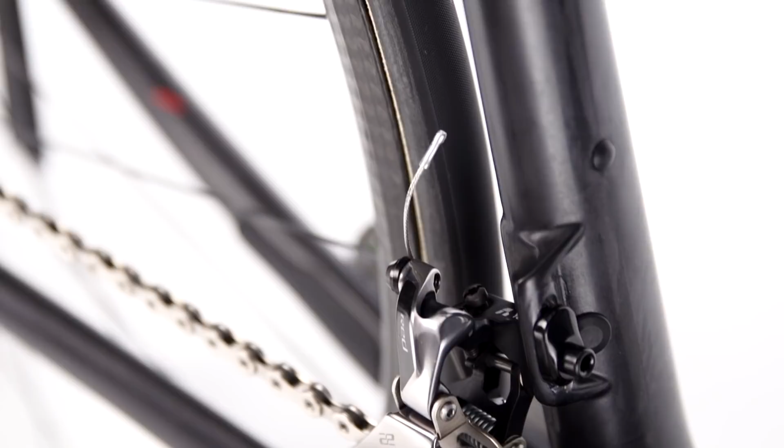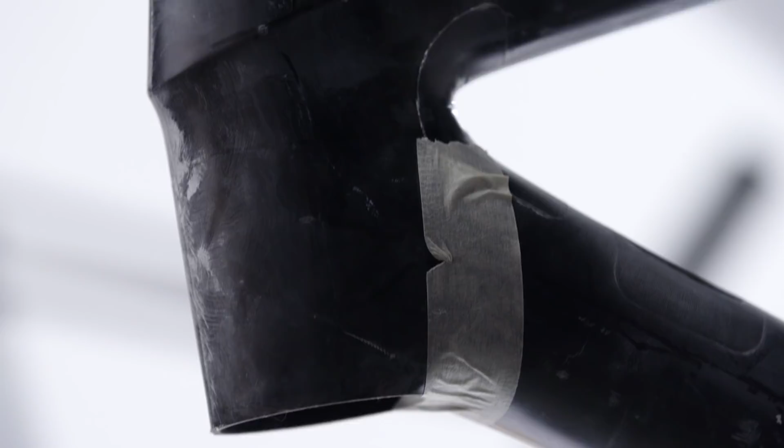You mentioned ride quality with vertical compliance, but also in terms of ride testing, I know we did a lot of work on this bike to make it actually ride the way we wanted it to. Can you talk about that? Yeah, so ride quality is one of those levers that we played with. Every tube shape has a testing number that's associated with it. So as we are twisting this frame in the computer, we're able to predict how it's going to ride. Yeah, I was one of the ride testers on this project, and we had been riding these over a year out from launch to really fine-tune that stuff.

Were you involved with any of the discussions with the team on having them test this and prove out that this was a great bike? Having our own team is a huge benefit. We like to use them in a couple different places in our process right away when we're thinking about a project. We interview them, we talk to them about what they hate about the current project or what they want to improve.

So obviously, huge success. We had a 10.25 pound complete bike, really well regarded frame in terms of ride quality, handling. How did we start focusing on the development of the second generation bike? That's a cool question that people like my mom would ask. You just made the best bike ever. How are you going to make it better?

So that's something that we ask ourselves: what's next? I think a lot of it comes down to dissatisfaction. There's always something that we wished we could have done. We didn't have the materials available yet, or we didn't have the technology to analyze it the way we wanted to analyze it. It's hard to leave your baby behind, but if you know that you can do better, we just keep doing that.

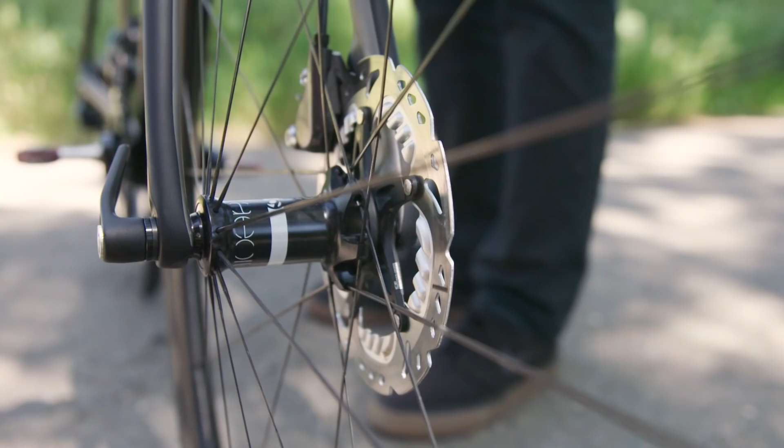So we're always trying to up ourselves, and that's where the next generation came to be. So what specifically were we looking at when we were making that leap from first generation to second generation? What were those dissatisfactions? We had to make it light, make it work with disc brakes. We had to employ some new tools. We have software that can allow us to input all those variables, and it'll calculate hundreds of different options and find the right combination of stiffness, less material, comfort, whatever the attribute that we're after.

So you're saying you didn't do anything on the new bike, it was all computers? Typed in a couple numbers and then science.

Nope, still a full team. We just had another tool to help us out. So we still have to make decisions about which one of those iterations is important. What specifically were some of the features on this bike that came out of that research and development?

If you look at the head tube on that bike compared to this one, this area has actually gotten wider on this version. This bike here. You wouldn't expect making something bigger is going to make it lighter, but it does make it stiffer. And the way we were applying the materials, we're actually able to make the whole bike stiffer. Subtle changes like that made big differences.

You also see the top and bottom of the top tube in this model are concave. That helps with the structure of the seat mast and to be able to carry the stiffness all the way through the top tube into the seat stays and keep that part of the bike anchored. Pretty subtle stuff, but when you're talking about the amount of optimization that went into this bike, it takes 90% of the time to do the last 5% or 2%, and that's kind of where we were in this bike.

Right. And so obviously, going to a disc frame and being at 665 grams versus a 690 gram rim brake frame, that was a lot of weight that we had managed to pull out of that. Yeah, pretty incredible. So in your time researching and talking to those riders, what are people dissatisfied about?

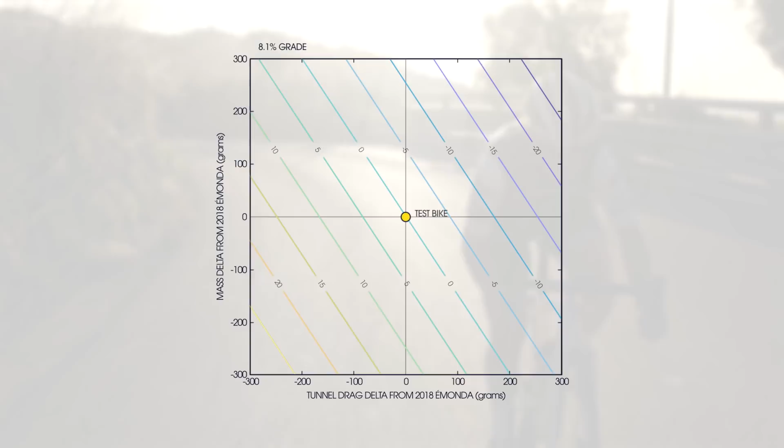Right. We know if we reduce the weight and if we get faster, we'll be faster up Alpe d'Huez, but that's not necessarily the most efficient way to get there. So before we did any engineering at all on the bike, we decided to create a roadmap about what's the most efficient way to be faster up Alpe d'Huez. And the way to do that was to get our current bike, calculate the time up Alpe d'Huez. And then what happens if we add 500 grams of weight to the bike in order to reduce the drag by 100 grams? And we did that trade-off for every single point on this roadmap, plus or minus 1 kilogram of weight and plus or minus 30% in aero.

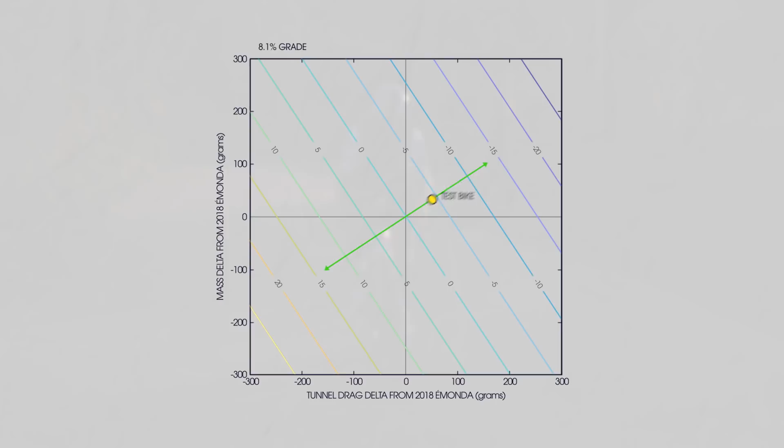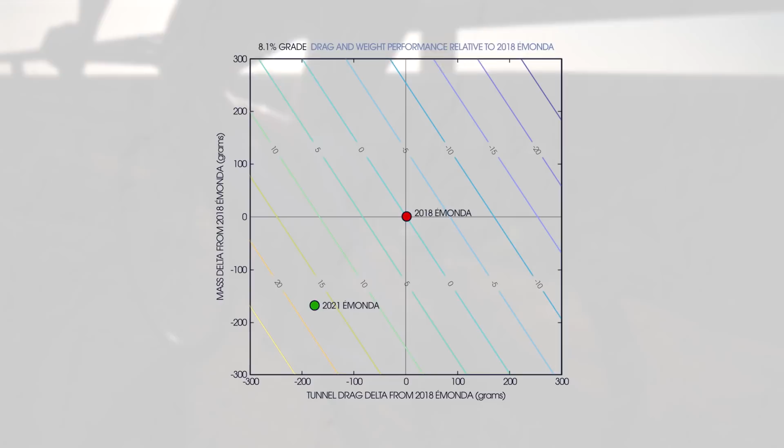And so what you get on that map is a set of contours that's really similar to the elevation contours on a map. You want to see the fastest way to climb up a mountain, you go in the direction that the contours are closest together. And so you do the same thing on our roadmap, where the contours are the time up Alpe d'Huez. So we see where we are currently, and then we see if we reduce about 3 times the drag for every unit of weight, that's the fastest way to get faster up Alpe d'Huez. Every time we create a new prototype or have a new wind tunnel test or run any CFD at all, we can track our progress on that map to be faster.

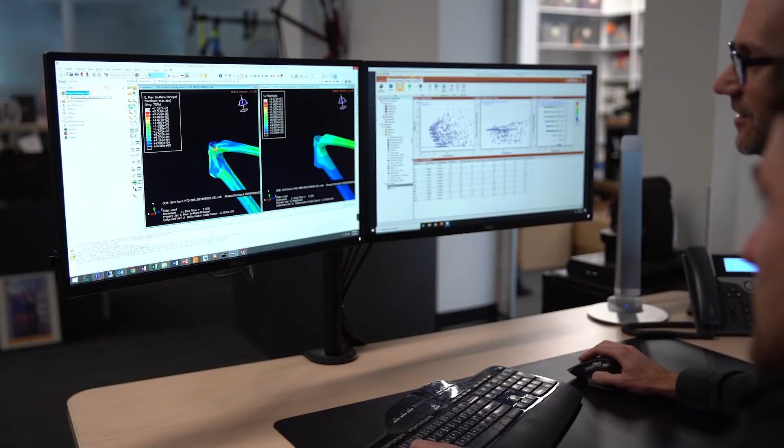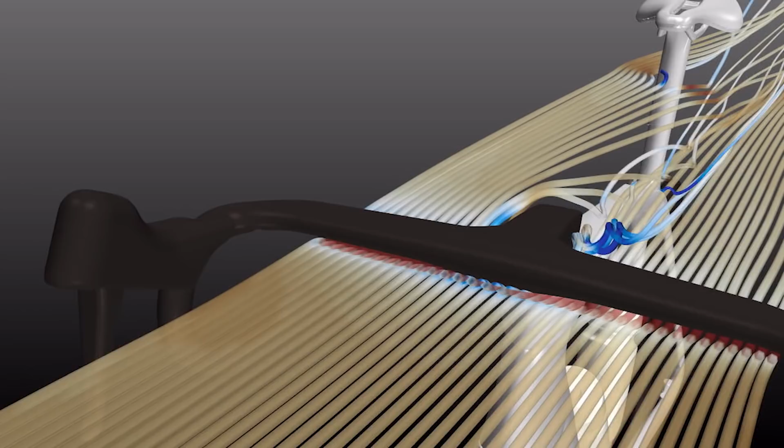So we've identified that balance. We know how much faster and how much lighter we want to make the bike. How do you then start designing that? We didn't want to just make a small change from the old Émonda. So we had a clean sheet design. We tried everything that we thought might work. Lots of different concepts that we narrowed down looking at aerodynamics and structures. Once we narrowed that down a little bit, we got our initial concept and entered the detailed design phase of the project, which was where I did a lot of detailed CFD, computational fluid dynamics, on that initial design, and kind of ran through the flow visualization with a comb to see where the areas of opportunity are.

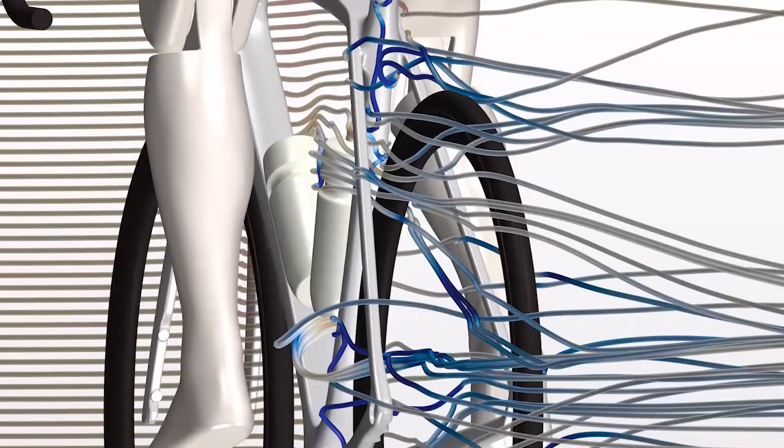Where do we put the highlight lines? How deep do we have the tubes? Things like that. So after that detailed design phase, we've kind of locked down where we are in the geometry, where we have features like highlight lines and how deep tubes are, but the tube shaping themselves, that's really where HEEDS shines, and so that's the final phase of our design process. And then what is HEEDS?

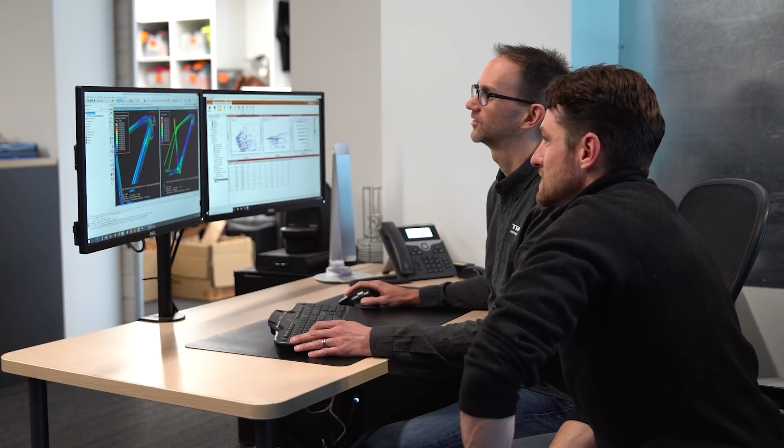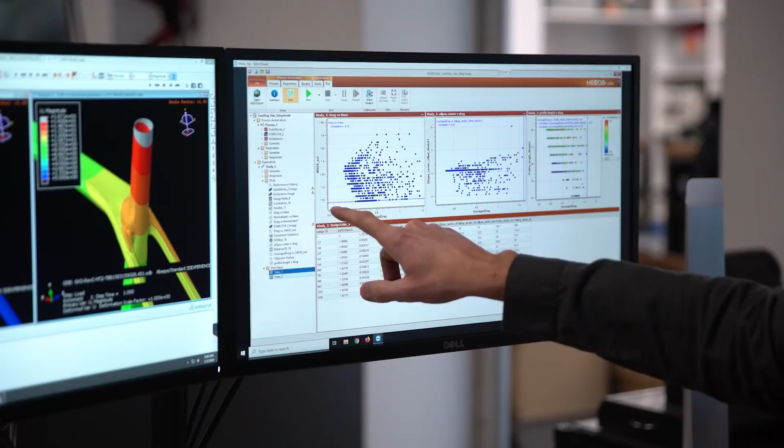It's a software that connects all of our different engineering software, so it connects my CFD, it combines that with our structures, it has an optimization algorithm that connects these different analyses and tracks them onto that ideal blend of weight and aero. Instead of me trying to do this manually with our structures team where I say, okay, this design is 10% faster, but the structures team then says it's 100 grams heavier. Well, then they have some recommendations which screw up my aero, and we kind of go back and forth. The optimization software helps track directly onto that most efficient path that we calculated in the roadmap.

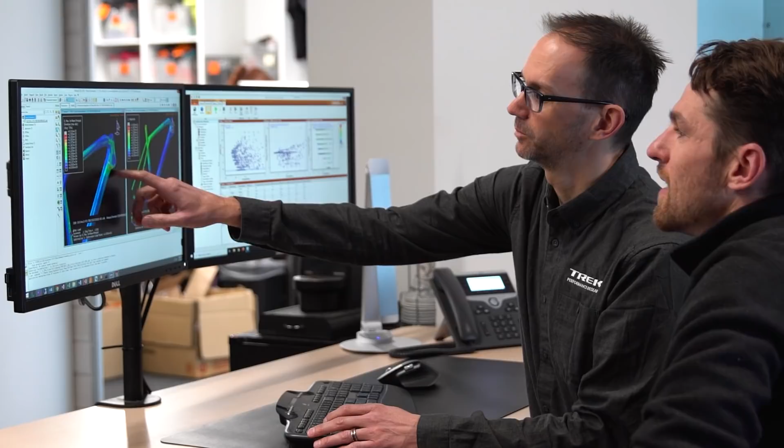Okay, cool. And so is this something that can just run on your laptop at work, or is there a lot more computing power behind this? So yeah, we have, I guess you could say, a supercomputer. We also, for really high computationally intensive cases, will burst to the cloud. So that's what we'll use for things like unsteady aerodynamics.

Unsteady aerodynamics is particularly important for a bike like Émonda because you're riding slower. Your riding speed is almost as fast as the gust that's coming in, which creates a limited time disturbance that propagates down. So you have to look at that unsteady aerodynamics, which is kind of an order of magnitude harder to solve computationally. So are you saying the Émonda is more optimized for climbing aerodynamics? Would you say that? Right, that's why we focused on unsteady aerodynamics.

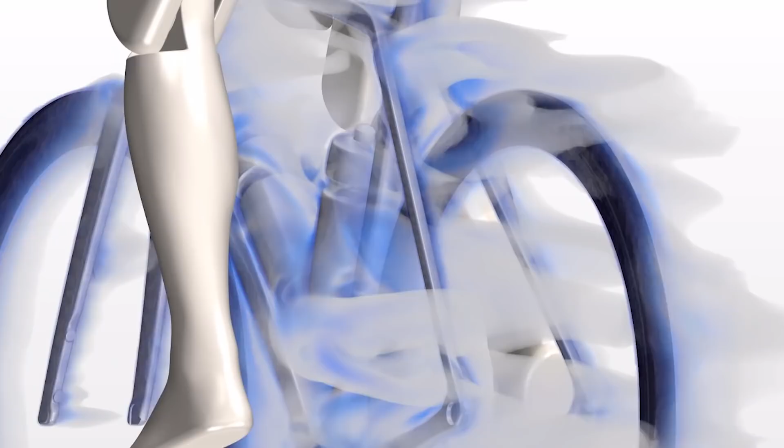For something like Speed Concept, unsteady aerodynamics will be important if you're riding in very heavily gusty conditions, but not as important as if you are on a bike with much shallower tube shapes and when you're going slower with more wind coming at you. All those three things create the recipe for unsteady aerodynamics, and you see all those three things in a climbing scenario. So that's why we really focused on it for Émonda.

Okay, awesome. And can you point out some specific examples of how we actually tweak these tube shapes, both through CFD and HEEDS? Yeah, so we kind of started from front to back because there's the most area of opportunity in the front before the airflow gets churned up by the legs and all the different turbulence from the tube shapes. We spent a lot of time on the highlight lines and the head tube, making sure those straighten the flow out and were aerodynamic. In particular, the down tube, we spent a lot of time in HEEDS on. It's a really good candidate for optimization.

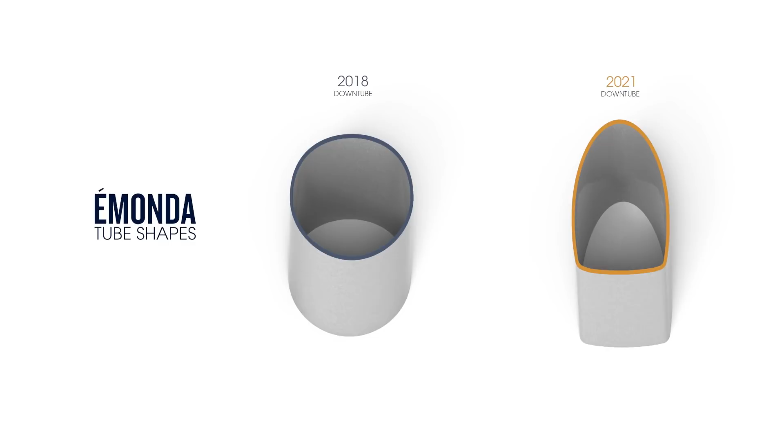So at the top of the down tube, you've got the rim and tire that are influencing the aerodynamics on the down tube. So that's a different scenario than right here, where you've still got a wheel in front of you, but the rim and the tire, they're further away. So you've got more time for the flow to straighten out at the nose. And then often you'll have a bottle, so we ran with and without a bottle, and that created a slightly different shape in this section of the down tube than this section. And so you see that in a lot of areas on the bike.

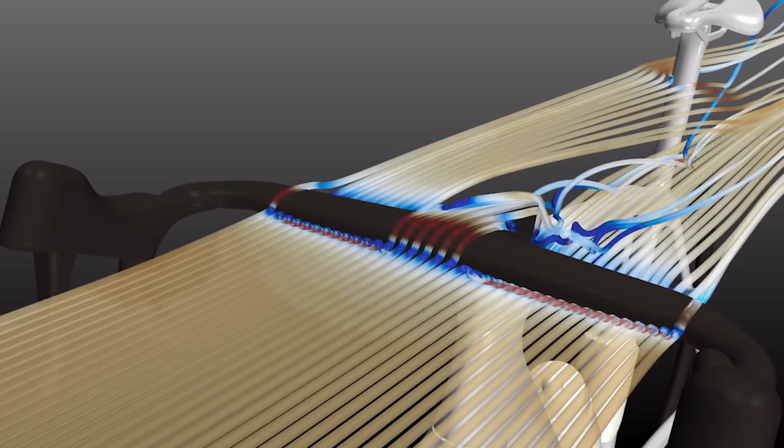The other part of the bike that we spent a lot of time on for aerodynamics is the bar stem. And the bar stem has a lot of aerodynamics baked in, but also trying to balance out the ergonomics and the structures, obviously. So we had started with our Kammtail shape on the tops of the bar, but the Kammtail shape isn't really that comfortable to grab because you've got kind of a hard edge in the back. So we increased the radius there, but ended up with, I think, a really good shape that blends all three of those. And so it's a really fast bar stem. Cool. Yeah, I can say, having ridden it, that I find it to be pretty comfortable, and it feels like it struck that balance really well.

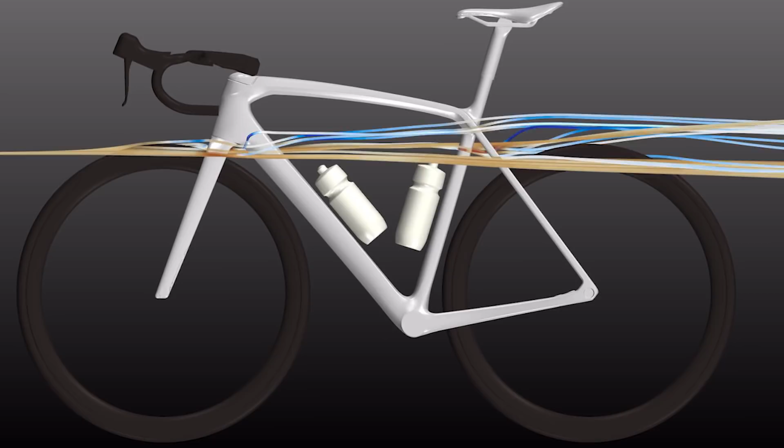Awesome. So we have this great testing tool of CFD with actual wind tunnel, real world experimentation. How do you balance those two things? Really the meat of our design process happens in the CFD, partly because you can do rapid designs in there. You can also, though, do whatever you want. We can take our findings from on-road experiments and say, okay, there's this amount of turbulence. We can plug that into the CFD and try things like, okay, this is a slower climb up in the Alps where there's a lot of gusts. You can't necessarily do that in the wind tunnel. We do use the wind tunnel, of course, though, for validation. It's the ultimate authority on, is your bike faster in a steady environment?

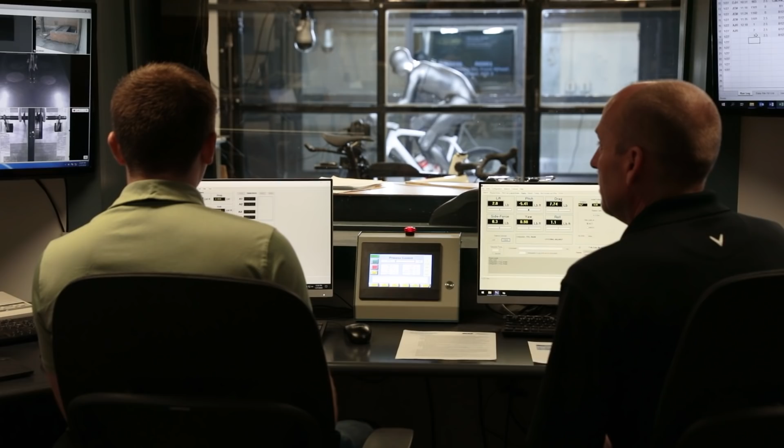For the Émonda, we had, I think, 3 wind tunnel tests. So the first one was our first prototype, and then the second one was what we thought would be our final prototype, which ended up being great. And then the third one was our total validation of our production mold and how is the final bike, checking to make sure it's as good as our second wind tunnel test, which it was. Awesome. That must feel good when you get that agreement. Yeah, it's always a little bit nervous before the test happens, and then the test itself is a whirlwind of activity. But then, yeah, to see the numbers line up is really great. Awesome. It means you did your homework right.

Yeah. And for our friends who don't live in places where it's super hilly and still care about fast aerodynamics, will the Émonda be really good at a high speed as well, aerodynamically? Yeah, so when you're going fast on the flat, the aerodynamics are almost the entire part of the picture. And so 180 grams is a huge impact there. That is about 18 watts of power and would end up being about 60 seconds per hour faster on the flat.

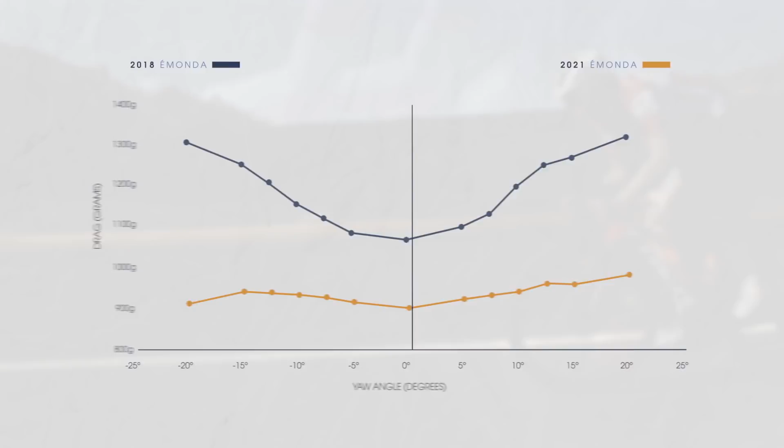So we've talked about how we got there, what the changes to this frame are, what's the science and the math we can put behind what we've delivered here. The new Émonda was about 180 grams faster in the wind tunnel at pretty high speeds. That's going to be about 18 watts.

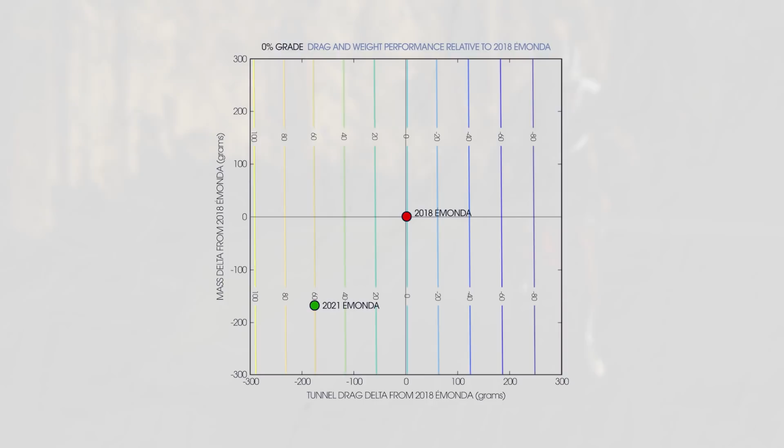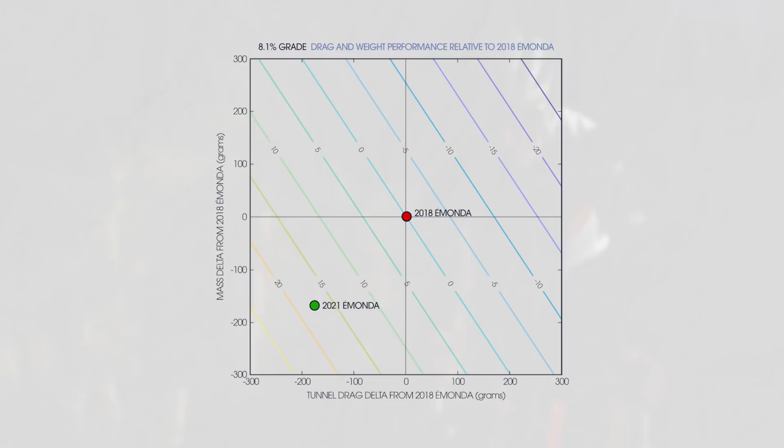And then in terms of time savings on a flat surface, that's about 60 seconds per hour faster. And then with our Alpe d'Huez target, that was about 18 seconds per hour faster up Alpe d'Huez. So that's a huge margin, especially when you consider a racer on Alpe d'Huez finishing 6 seconds behind the leader or 12 seconds in front is huge. Yeah, seconds definitely matter in that scenario.

So awesome. And so for someone who's not a professional, who's not going to win the Tour stage up the Alp, how much aerodynamic savings and impact will they see on this new bike? Right. So if you think about it, the slower you ride, the more opportunity you have for aerodynamic improvements. The other thing that helps with this bike in particular is that it is a climbing bike. It is optimized for speeds that aren't necessarily that 45K. And so a climbing bike is nice for that regime of aerodynamics.

Awesome. So you're saying this is faster for pros, but maybe fastest for the average person? Right. I mean, I ride an Émonda, so this will be fastest for someone like me.

Okay. Yeah. Awesome. Are you getting a new bike? Yeah. Can you hook me up? See what we can do.

Okay. Thanks for that awesome overview of the development, and congratulations on some huge success here. I mean, 180 grams of aerodynamic benefit saved is massive, and putting that in perspective of a minute per hour on the flats is really remarkable. So nice job there. Thank you.

Next, we're going to turn to Jordan Roessingh. He's our product manager for Road, and he's going to be telling us all about OCLV 800, the new miracle carbon fiber from Trek. It's really a huge leap forward for us. And that's really important because we made all these aerodynamic improvements, but we needed to keep the weight down, as John mentioned. And so OCLV 800 is our key to doing that. And Jordan's going to tell us all about that.

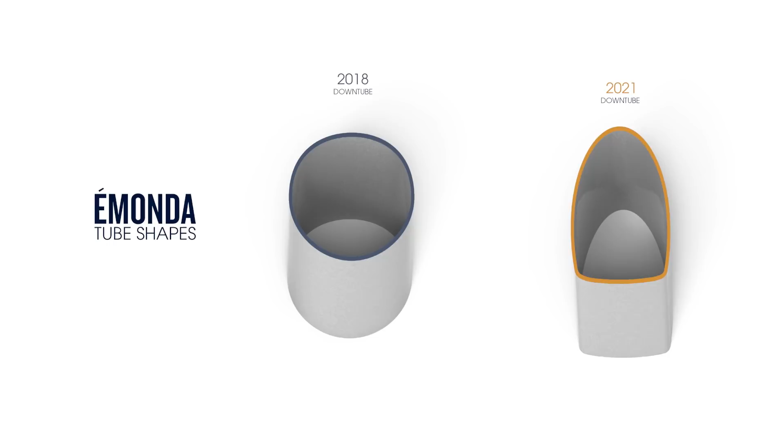And so when we went through that aerodynamic investigation, we discovered that as you add aerodynamics into the mix, the frame shapes become structurally somewhat less efficient. And so that means that the bike, in order to maintain the same strength and stiffness, would have to add weight. And so we set a rallying cry of 700 grams for the frame that we wanted to stay under in this development process.

We really needed a new material in order to hit that target; OCLV 700 wasn't going to be able to hit our frame weight targets. And so we had to go out and try to understand if there were new materials, new processes available to us that we could leverage to hit our goal.

Obviously, we're not using one material through the whole bike. We use different carbon fibers in different applications. Can you tell me a little bit about some of the properties of different carbon fibers and why we would choose them?

Yeah, so within a carbon frame, there are a bunch of different fiber types as well as a bunch of different pieces of laminate that we use throughout the entire frame. And so what we're really looking at doing is understanding what the behavior of the frame needs to be in specific areas. So in order for a bike to be really responsive, then we really look to a stiffness value.

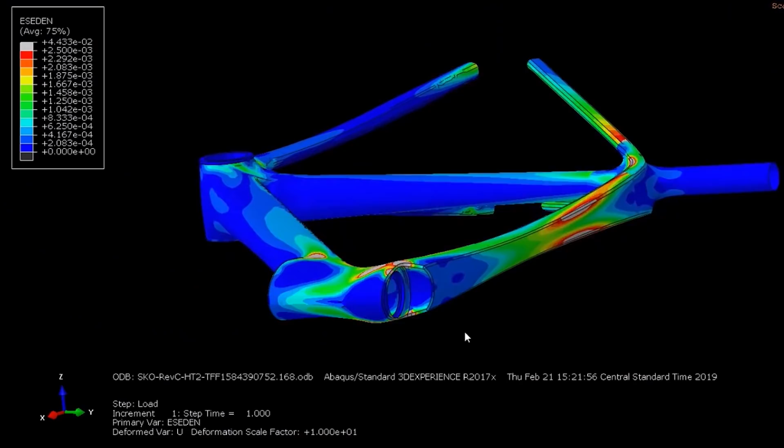Obviously at Trek we go through a lot of rigorous tests on our frames, and so for that we're really looking at strength of certain areas, and we have to figure out how to balance those two things. So get a bike that's really responsive but yet still pass all our testing at the super low weight, and obviously that's a very difficult balance to make because generally those two things are sort of inverse. If a material is stiffer, it's not going to be quite as strong or able to absorb energy. If something's really good at absorbing energy or really strong, then typically it's not quite as stiff.

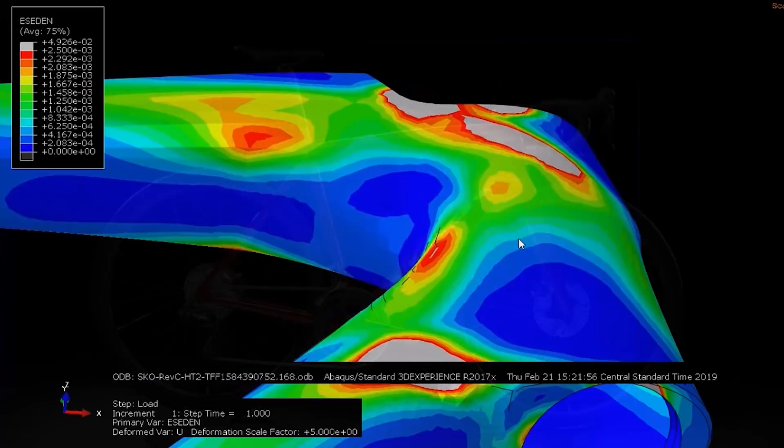With OCLV 800, the property that we really benefited from was strength. So we were able to hit our stiffness targets still at below our weight target, but then the frames weren't going to be able to pass our testing essentially. So we didn't have any limitations on the stiffness front. Where we really had limitations was on the strength front. And so OCLV 800 from a fiber type perspective is 30% stronger than the previous material that we'd been using in OCLV 700. It was what enabled us to still pass all of our testing and hit that weight goal and still provide the stiffness that we wanted.

And so we leveraged it in specific areas of the frame where it benefited most from that property of having improved strength, but we were able to save a significant amount of weight versus if we were just using OCLV 700. Great, and how much weight does that save over OCLV 700? If we were to take same stiffness targets, obviously passing all of our tests in the same frame shape, we'd be looking at about 760 grams. So we're looking at a little over 60 gram total savings by leveraging this new material, which is massive. Wow. That's what, like 8% of the total frame weight? Yeah, so that's huge. In things that are very optimized, where we're really looking at sort of incremental gains, 8% is a huge number.

Yeah, wow. So obviously having something that's 30% stronger sounds like a huge home run. Was that really easy to just say, oh, we're going to make this area stronger, put the fiber in there, and the frame's great to go, or did it take a little longer to actually dial that in? It takes a long time to understand how to properly use those materials. So anytime we have a new fiber type, we have to go through a bunch of different tests and understanding where on the frame it most benefits from that, and how specifically to use it. So I think overall it was about a 2-year development cycle once we first got access to this new fiber type, and began leveraging it in something like 250 frames in development. So just breaking frames over and over and over and gaining the most benefit out of that new fiber.

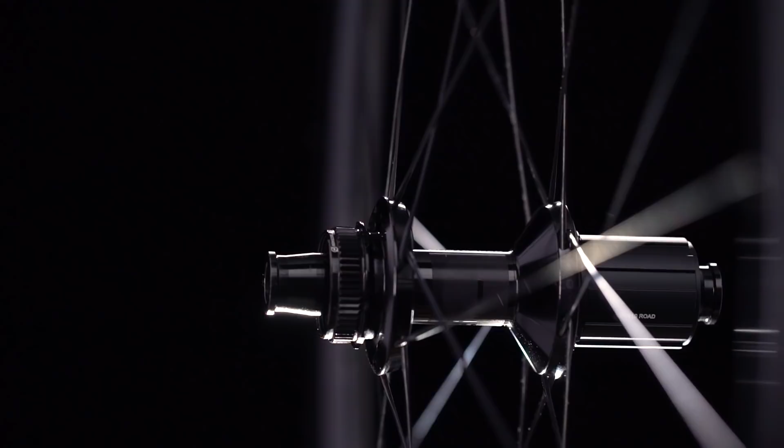Know that they're 1,325 grams for the set, which is 55 grams lighter than the previous Aeolus XXX2 wheels, but they're also 30% deeper. How did we pull that off? When we set off to develop the wheels, we basically had the same goals as you guys had developing the bike frame. So we started by reviewing the laminate and making some updates there from what we've learned over the years. This was the first time we also have done disc only, so we could take some weight out with that.

The second piece was we're using the new DT Swiss hubs. These actually add a little bit of bracing angle to increase stiffness, so we could take some weight out of the rim and keep the same wheel stiffness. And the third piece is the hubs are just a little bit lighter on their own as well. So what's the ultimate payoff in terms of speed to the rider with these wheels? How much faster are they?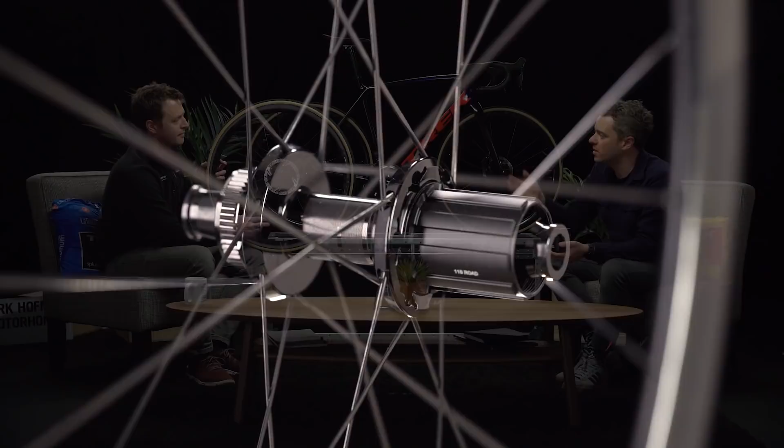Yeah, so our goal with this was to, like I said, match the wheel set weight as XXX2. We actually did a little bit better than that, and then make them as fast as possible. So we did optimization similar to what we did on XXX product. And also with the new hubs, which are a little bit more aero, we gained 17% versus the XXX2. And we're pretty close to matching the speed of the XXX4. Wow, that's really impressive for a wheel so shallow. So we've got this awesome performing wheel that's 17% faster than a XXX2 and even lighter.

I've also heard we've got these Aeolus Pro 37s. Can you tell me what the difference between those two wheels are? Yeah, in the past for Aeolus Pro, we've used the last generation shapes. And this time we decided to bring the newest, best shape to that wheel set and then reduce cost by making a simpler laminate, making it a little bit easier to manufacture, and also go one level lower in the hub. They'll still have the DT Swiss Star Ratchet hubs, but it's a spec lower.

Okay, so it sounds like we have a really great package on the Aeolus Pro 37, but we have an even more affordable wheel, the Aeolus Elite 35 and 50. Can you tell me about those wheels? Yeah, so at Aeolus Elite, we've kept the proven shapes from the Aeolus 35 and 50 that we've been using for a while. And also, over the years, we've been able to increase efficiencies in the manufacturing, which helps bring down costs. Okay, so that sounds like a great family of wheels.

Why should someone really be excited to put Bontrager wheels on their bike? Yeah, I think there's two main reasons for that. The first is we do a ton of testing. We've developed our own internal tests, and also we do all the industry standard testing. But we spend a lot of time and money validating any new wheel we do. Along with that, we work with manufacturers that have the very best technology and really make sure they have good quality control.

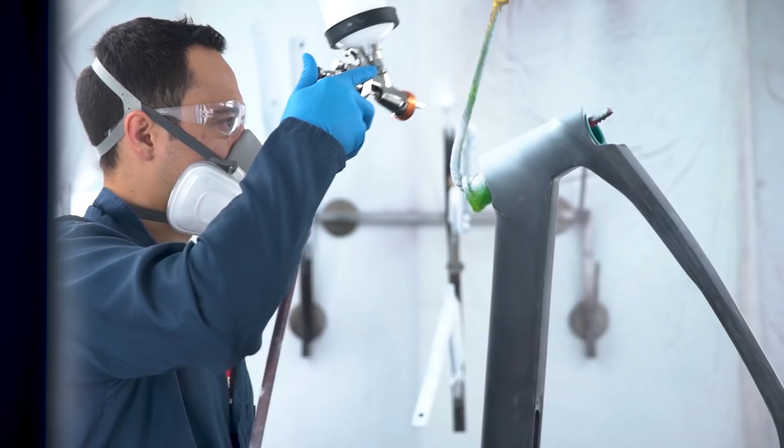That all sounds great, but what if I want something that I can't get through Project One? Well, you can still get it. It's what we call Project One Ultimate. And what Project One Ultimate allows you to be able to do is design the bike just for you. It allows you dedicated time with one of our graphic designers, and that allows you to be able to custom design icons, choose colors that aren't potentially within our palette, and really custom design the bike with no holds barred.

Wow. It also allows you to be able to choose any spec you want, so any spec that's even not within our program regularly. So it allows you to be able to customize the bike really in an ultimate fashion, any spec, any color, with custom graphics throughout, and that's what we call Project One Ultimate. Great, that sounds amazing. But is there anything more accessible in the Émonda family? Yeah, well, we're actually also introducing a brand new family of Émonda SL bikes.

All right, so after a real quick bike swap, we're back here with what I'm told is an Émonda SL, but this thing looks just like an SLR. What's going on here? Yeah, it is actually an Émonda SL, but the reason it looks like an SLR is that they are identical from a frame shape perspective. So the Émonda SL features the same H1.5 geometry, as well as all the same frame shapes as the SLR. The only real difference is in the composite itself. The Émonda SL uses OCLV 500 instead of the brand new OCLV 800, and so the frame weighs a little bit more, but otherwise gets you the same great ride, same great aerodynamic benefits of the SLR bike.

Wow, that's amazing. So what else is different between SL and SLR? Again, the frames are pretty much identical other than the composite. There are some spec differences though. The Émonda SL comes with traditional bar and stem systems, so this particular model comes with a Pro carbon bar and Pro stem. But otherwise, the differences are primarily spec and weight.

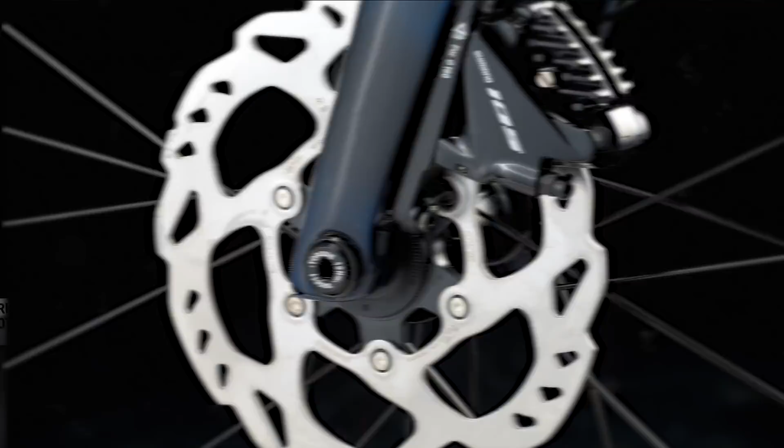Can you tell me more about the family of Émonda SL models? Sure, there's a huge assortment of different models within the Émonda SL family. It starts with the Émonda SL5, which features a full 105 drivetrain. Then you go to an Émonda SL6 with alloy Paradigm wheels on it and a full Ultegra mechanical drivetrain. There's the SL6 Pro, which has the brand new Aeolus Elite 35 wheels and an Ultegra mechanical group set. And then you're upgrading into the electronic drivetrain.

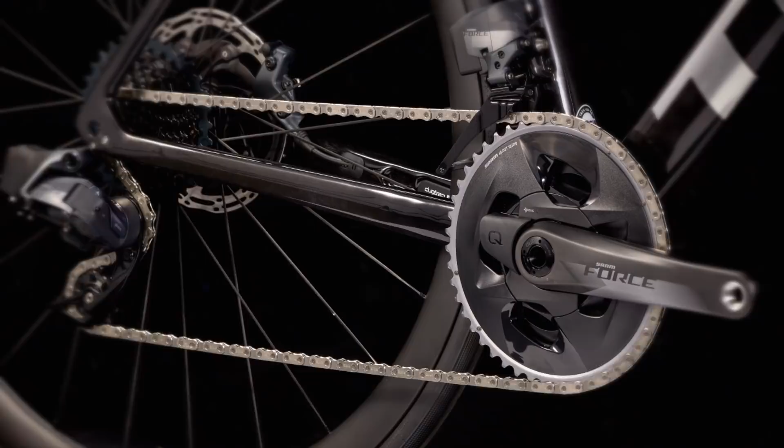So there's two versions of the Émonda SL7, one which features Ultegra Di2 and Aeolus Pro 37 wheels. And this particular version, which is the SL7 eTap, this bike is especially cool because it comes featured with a Quarq power meter on it. So you get Aeolus Pro 37 wheels, you get full Force eTap, and you get a Quarq power meter, all at an amazing value. It's really the full package.

Yeah, this does seem like a really amazing bike. So that Émonda SL does seem like a really great value for the Émonda rider, but obviously the SLR is the star of our show, so let's get that back out here real quick.